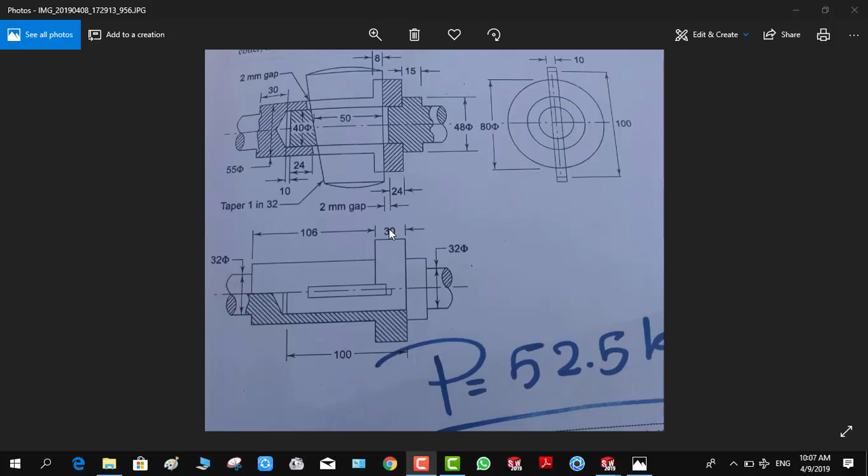First, I just need to justify that dimension we made in parts is not 30, it's 34. Okay, I made that change here. Then go to file, make assembly from part.

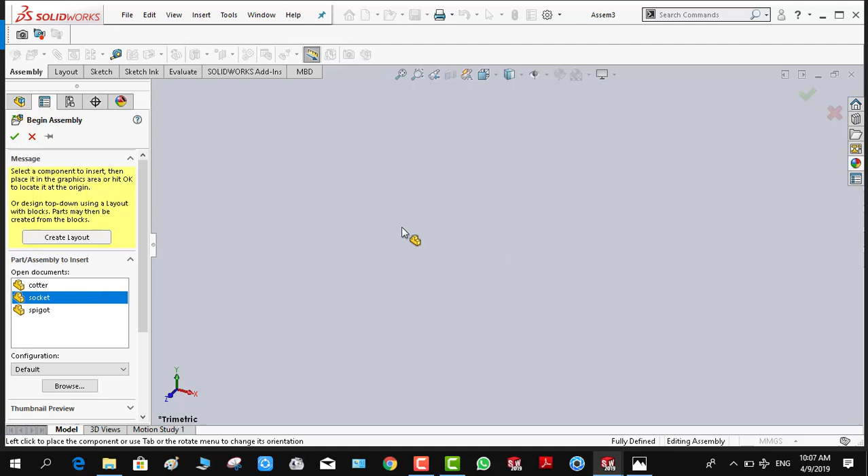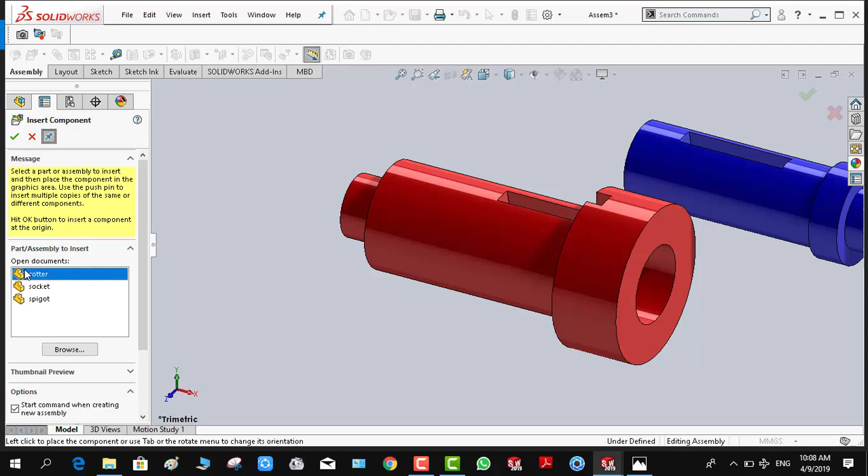Select socket, and if you need it to be in the center of the assembly, just click OK. Then insert component, select spigot, it will go, and if you need that tab to be continuous, click on that pin, select cotter, and you're finished, click OK.

Now I inserted all the components because there are just three. If you have more components, don't insert them all at once, to be clear to you.

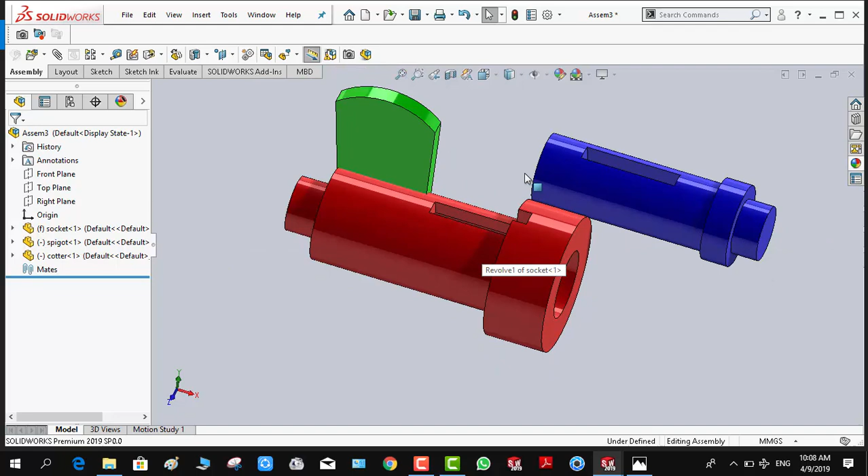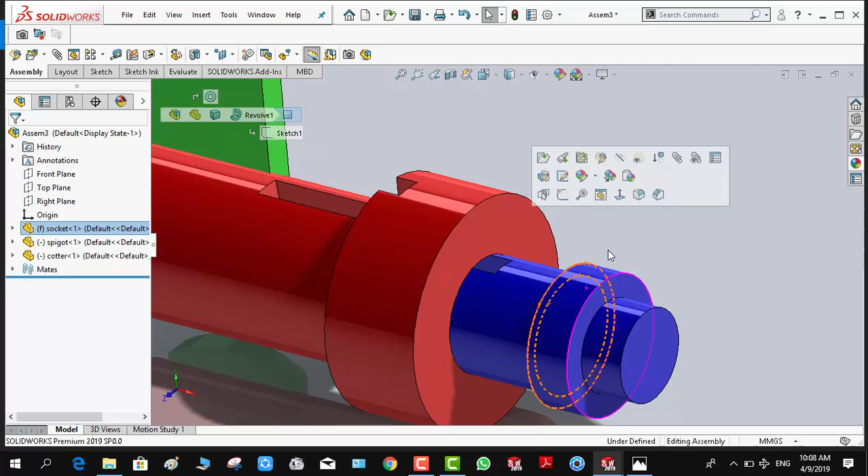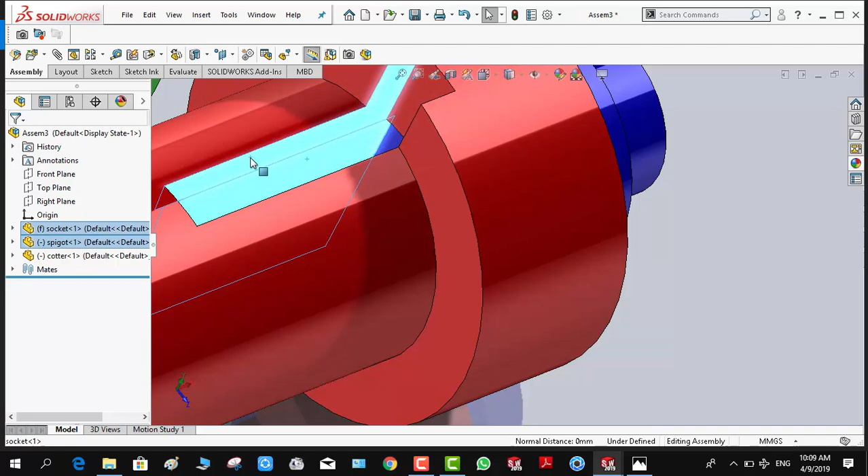I want that cylinder to be concentric with that cylinder. What I made is I want that face to be coincident with that face. I click that face, make a rotation, press Control, select that face, and in the pop-up you select coincident. Now, because we made all the sketches on the front plane, you will find that face coincident with that face.

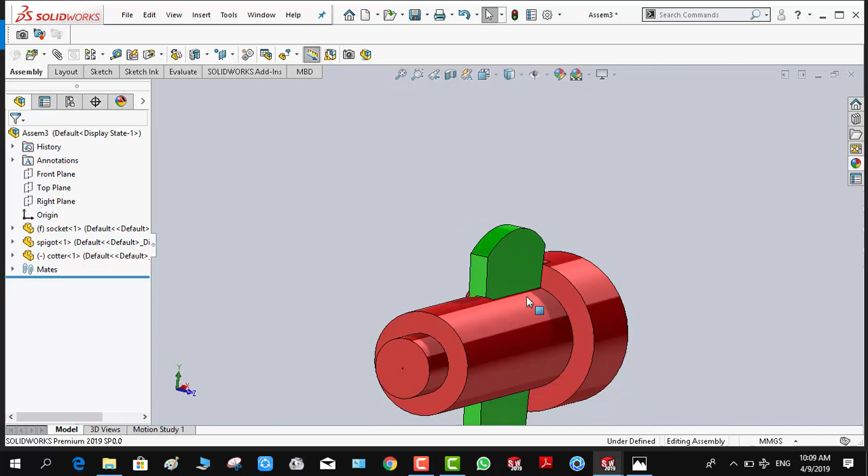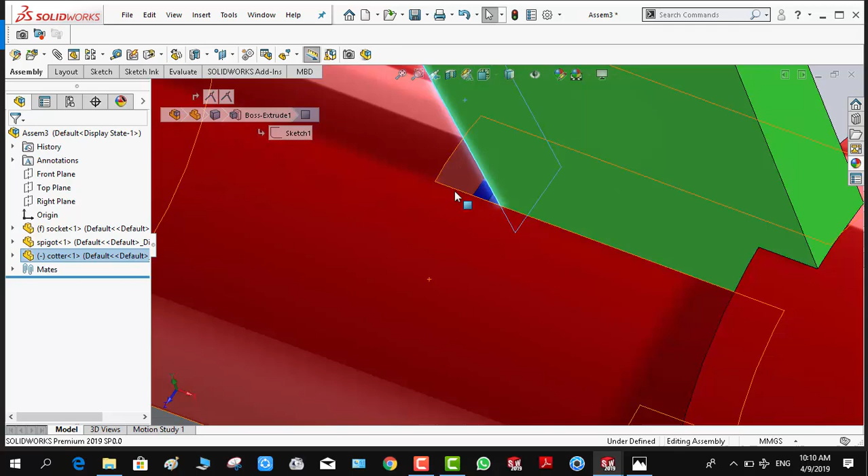Now to the cotter, I want that face, select it, okay, then rotate, then Control key, select that face, then coincident. Okay, again I want that face, control that face, coincident. The last mate is I want that face rotated to be coincident with that face.

Okay, now it looks nice and our assembly is finished. I hope that you liked the tutorial, and again, don't forget the basics of that assembly.

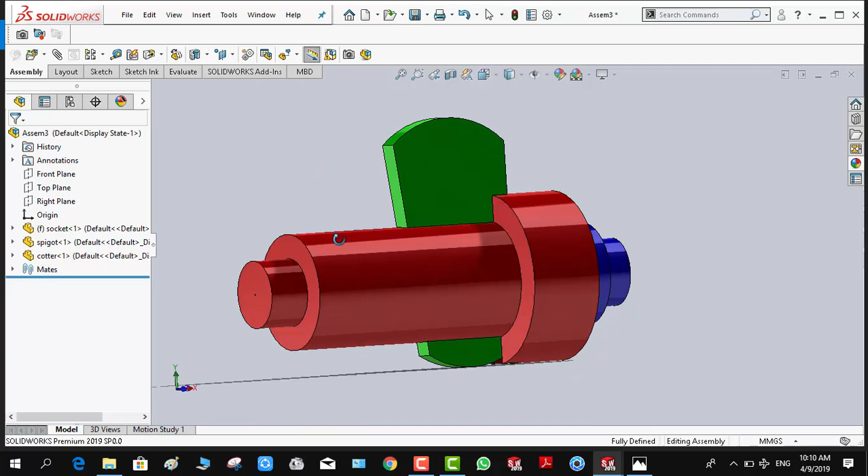First of all, when you make that cut here and in the spigot, don't forget to make it mid-plane, okay? And don't forget to change that dimension to 34, okay? And see you next time. Thank you.